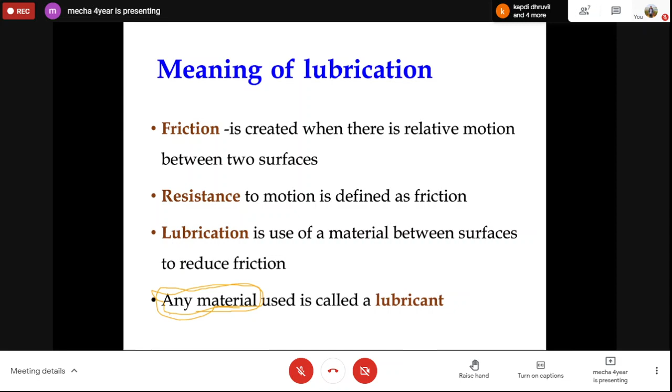Method of lubrication: two main methods generally counted in lubrication - hydrodynamic lubrication and boundary lubrication. So there are two different categories we count for liquid lubrication. If we are using liquid, solids are different. So basically there is hydrodynamic lubrication, boundary lubrication.

We decide the type of lubrication basically depending on the Sommerfeld number. However, in lubrication there is a Reynolds equation that is the fundamental equation used for lubrication analysis, but Reynolds number is not used to define the method of lubrication. There are two different methods of lubrication: hydrodynamic lubrication and boundary lubrication.

Hydrodynamic lubrication, as the name suggests - hydro means when there is a thick layer of lubricant and the complete load is supported with the help of a completely thick layer of lubricant, that is called hydrodynamic lubrication. It is also called complete or full film. It occurs when two surfaces are completely separated by a fluid film.

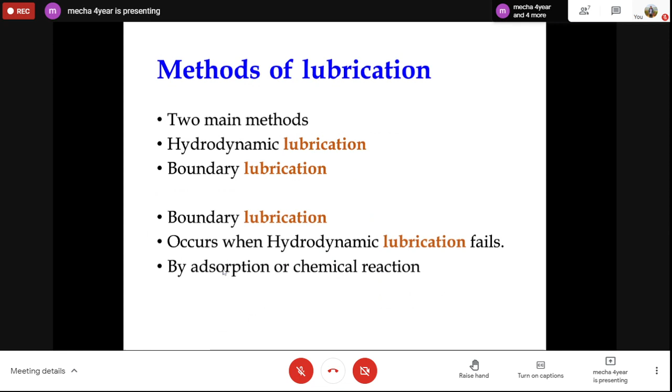Now coming to boundary lubrication. It occurs when the hydrodynamic lubrication fails by adsorption or chemical reaction. So boundary lubrication only occurs when the surfaces are in partial contact, then that is called boundary lubrication. See the basic difference, how the lubrication will act.

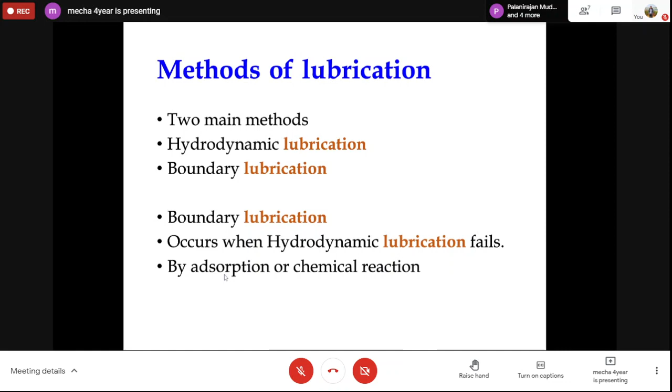So lubricant - as discussed in the previous slides, lubricants are those substances which are used to reduce the force of friction between two sliding surfaces.

So lubricants - are you able to hear my voice? Yes sir, are you able to hear? Yes, it's fine now, the net was hanging a bit.

So lubricants are those substances which are used to reduce the force of friction between two sliding surfaces. Any substance introduced between two moving sliding surfaces with a view to reduce the friction or friction resistance between them is known as lubricant. So basically what happens is two metal surfaces that are sliding and have relative motion, we fill them with lubricant and the lubricant reduces the friction. So any substance used to reduce friction between two moving sliding surfaces is called a lubricant, with a view to reduce the friction or friction resistance between them.

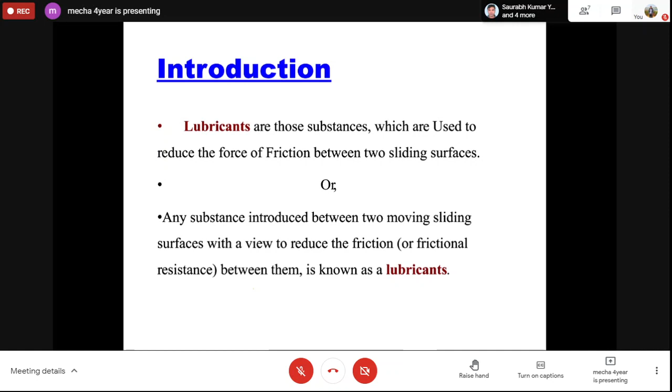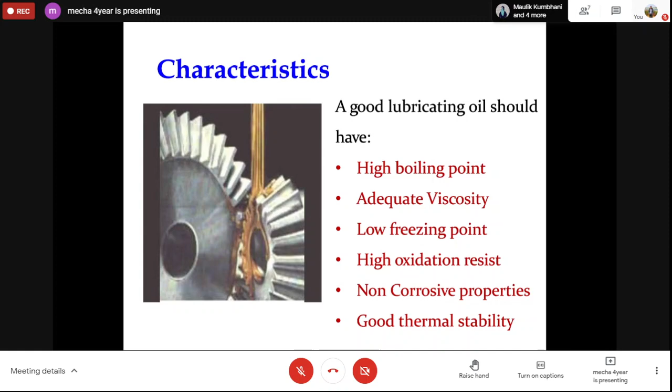It is required, but I have not discussed why these properties are required. High boiling point - we will discuss in detail. Boiling point is needed because the lubricant is very fundamental, protecting our rotating machines. Sometimes due to temperature increase in IC engines, the temperature rises, and because of that the lubricant has increased chances of boiling. So adequate viscosity is provided, low freezing point is maintained, high oxidation resistance is there, non-corrosive property is there, good thermal stability - discuss.

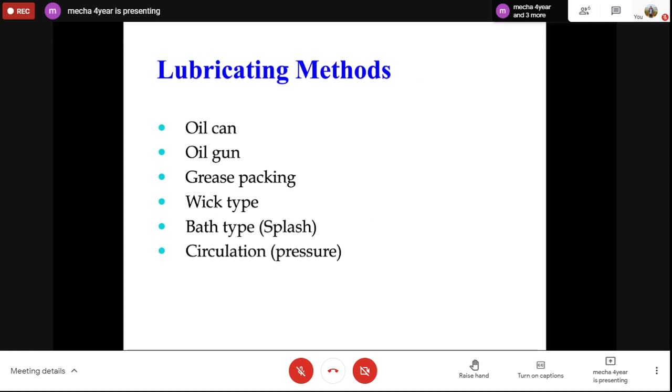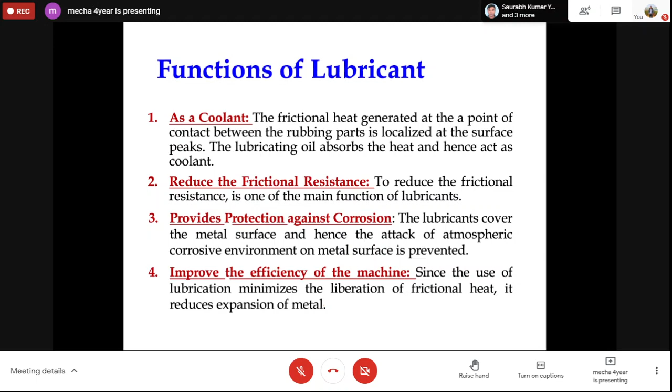So I think for today's class it is okay. So is there any query? Please let me know related to exam, to mark distribution, to lecture system. Please let me know. I will be happy to answer your query. Yes. Jeel, Kapil, and Palanzajan. Yes.